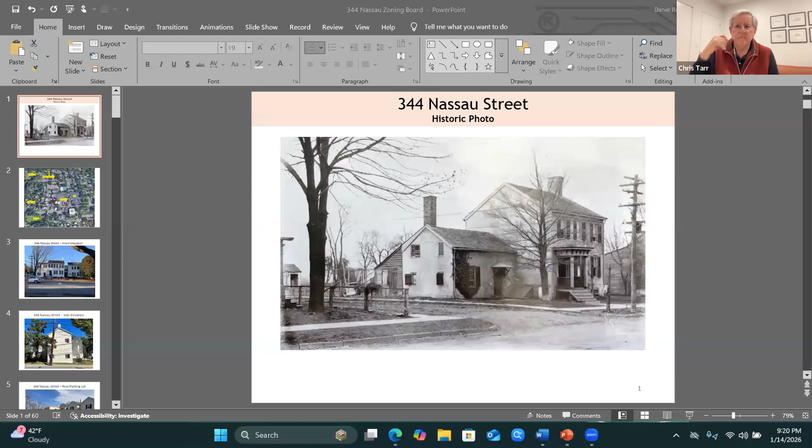Hello, good evening. My name is Daniel Barsky, and I will be presenting on behalf of the applicant for the project on 344 Nassau Street. On slide 1 is a historical picture of the building at 344 Nassau Street, which was originally built in 1760 and is also known as the Joseph Horner House. It's located in the neighborhood historically called the Jugtown District, and much of this application is based on preserving this building and its historic context within Princeton.

The site is located on the corner of Nassau and Harrison Street, oriented within the heart of Princeton. It's only several blocks from downtown, the Princeton Shopping Center, and multiple parks. It's also right next door to the Whole Earth Supermarket and Bank of America, with easy and accessible access to public transportation.

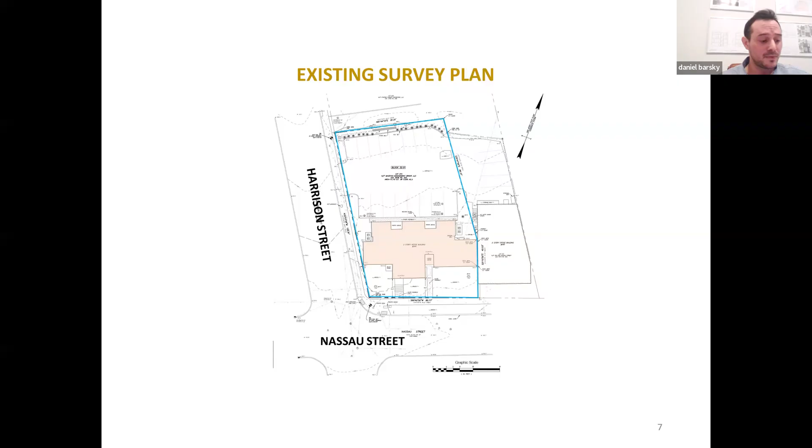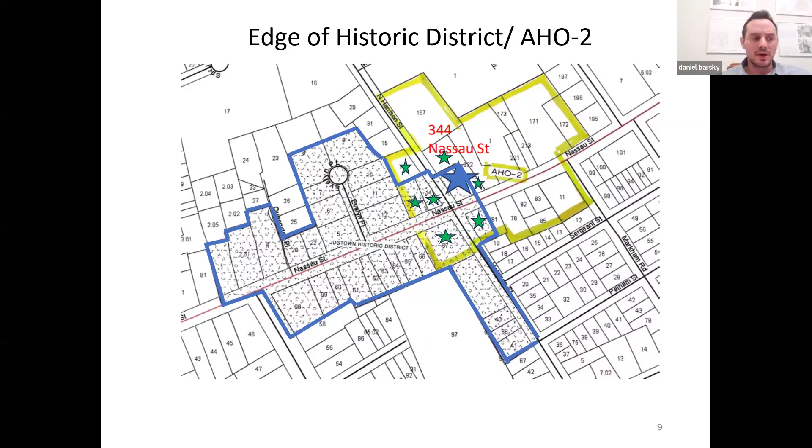I don't want to upset my friends at HPC and neighbors by bringing up a past application, but it's important that I give the history behind the approval process on this site. Over a year ago, I was in front of HPC presenting a proposal for a 4-story, 45-foot high, 16,000 square foot addition.

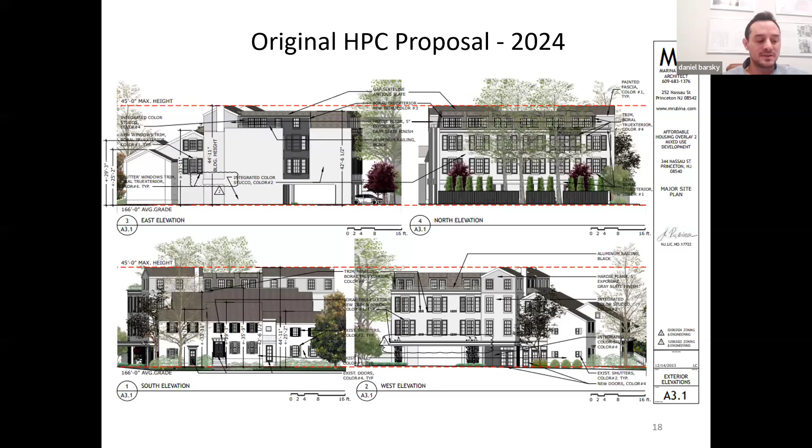The proposal was to attach this addition onto the rear of the existing building over the parking lot. Here's a rendering of what that looked like. To be clear, this rendering on slide 18 is not what we are proposing today at this zoning board meeting.

That's because we heard from HPC and many of the neighbors, led by the Save Jugtown group, about their displeasure with the proposal. The consensus from the community was that this previous proposal was not consistent with the historical district and neighborhood, specifically in terms of scale and massing. Most importantly, attaching a new building to the existing Horner House was a major concern in preserving the historical significance of the site.

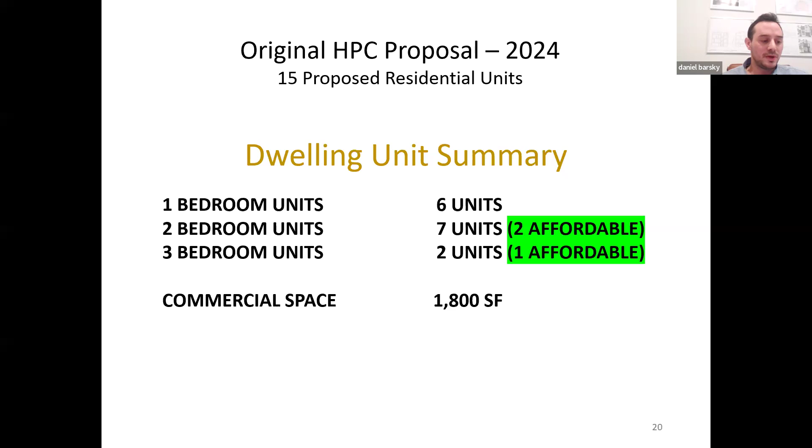The previous design proposed 15 units among 4 stories in a much larger building than in my newly revised proposal. But it's critical to note that this previous proposal was conforming to zoning in all respects. It met all the criteria for a fully conforming application after it went through the municipality's completeness process. Moving forward with this previous proposal would mean that I wouldn't have to come here tonight in front of the zoning board for any relief.

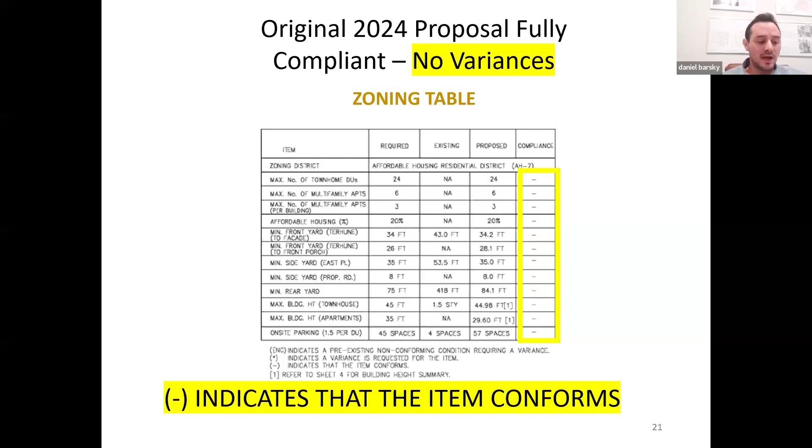However, after hearing feedback from HPC and my neighbors, instead of plowing forward with a fully compliant application, we decided to revise our proposal with the help and collaboration of Save Jugtown leadership, to propose a new building that is more in line with the neighborhood and better preserves the historic streetscape.

Now, on slide 22 is our revised building proposal that we're here today to hopefully get approval from the zoning board for. This new design proposes a freestanding building, totally independent and detached from the existing historical Horner House. There will be no demolition or disruption to the existing building.

Thanks to collaborating with our neighbors and HPC, we were able to come up with a plan that has been overwhelmingly well received by HPC and the surrounding neighbors. We feel this new design complements and preserves the existing historical building, providing an aesthetic improvement to the gateway of Princeton.

This new proposal has 10 residential units. 2, or 20% of them, will be allocated to the affordable housing obligation. The existing Horner House is to remain under its existing use as a commercial space.

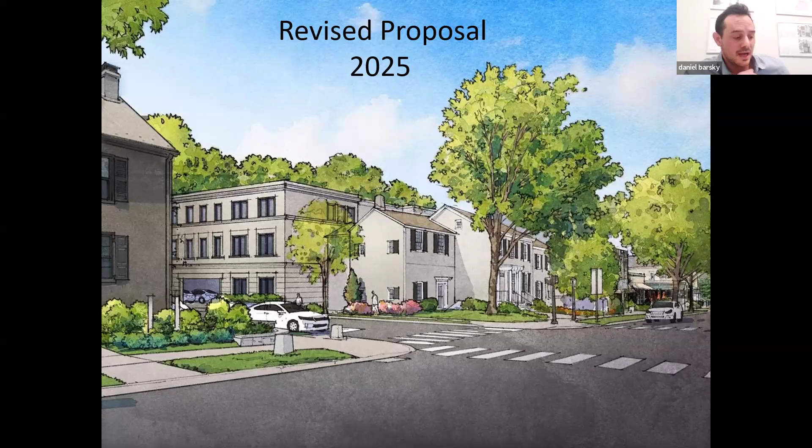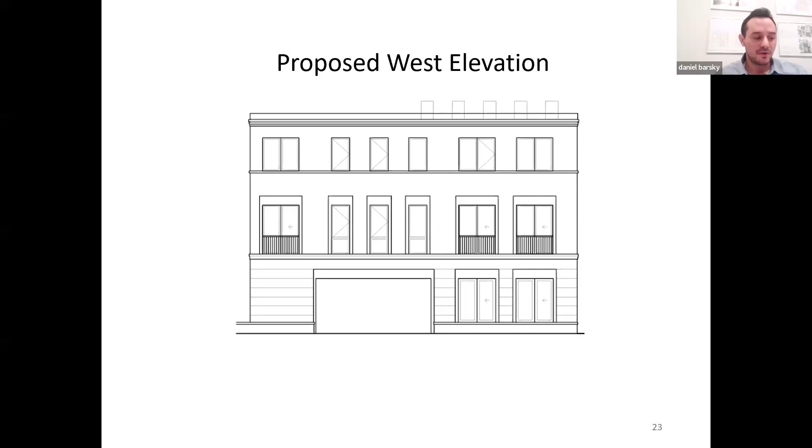Reducing the scale and massing of the building, along with its simple design, allows this proposed building to nestle into the site without greatly detracting from the Horner House. Again, critical to the design was to have it freestanding and totally separate from the existing building.

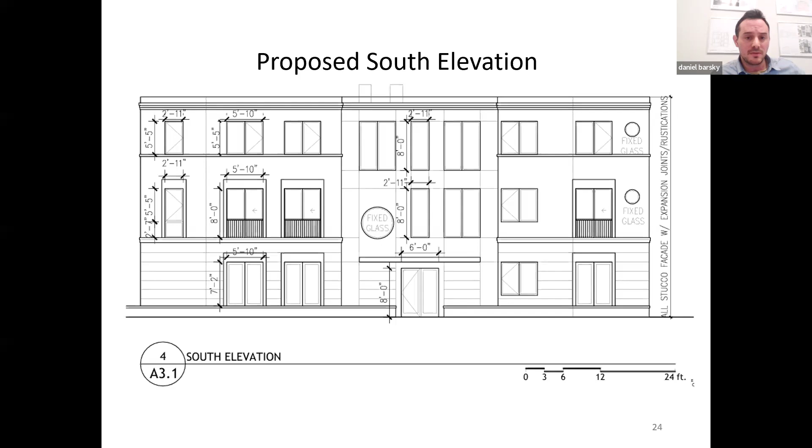On slide 24 is the south elevation, which faces the existing building on 344 Nassau. The north elevation faces the Foot and Ankle Doctor. And the east elevation faces Weichert.

On slide 27 is a cross-section of the building floors and height. We're proposing a 35-foot assembly with a 1-foot parapet, totaling 36 feet, reducing the height from the original 45-foot high compliant application, which was important in establishing compatibility with the neighborhood. As illustrated earlier, the height is in keeping with other buildings within the immediate vicinity.

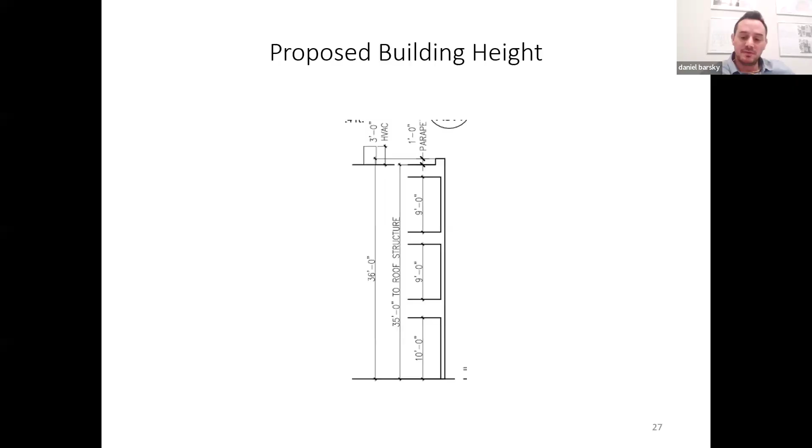This reduced height and scale ensures that from Nassau Street, the new building will not be seen from either side of the road, as depicted in this sightline drawing, standing on the sidewalk closest to the building and on the opposite side of Nassau.

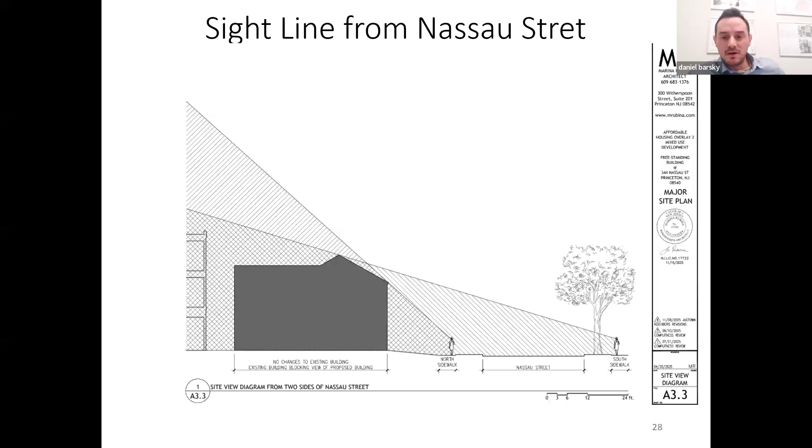The floor plans are relatively simple. There is access to a lobby from both the parking lot and the walkway. The building will be comprised of 9 2-bedroom apartments and 1 3-bedroom apartment, which is to be deeded for the affordable obligation.

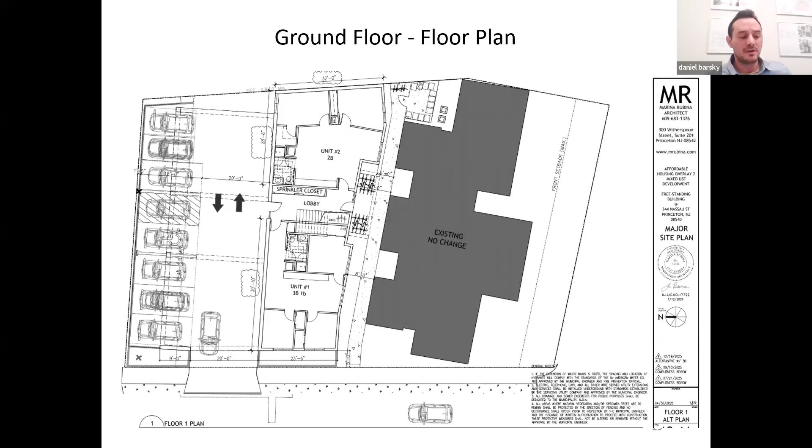2 of these apartments are located here on the ground floor. There's a walk-up stairway and 4 more units on the second floor, and then 4 more on the third. The second and third floor layouts are identical, so these are repeats for second and third floor.

There's a proposed flat roof with a parapet where condensers will be located. They're located in the middle of the span, so they won't be disruptive to the street and won't be visible. And I heard this come up in one of the comments.

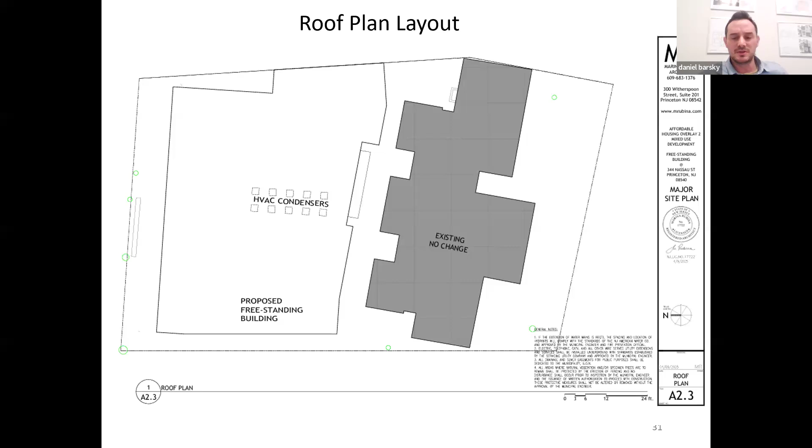I will install solar panel ready provisions during the course of construction. This revised plan, as we heard from the chairman, was encouraged and later approved by HPC. The redesign was coordinated with Save Jugtown leadership, our neighbors, and found to be compatible and aesthetically appropriate. Separating the new from the old, not disturbing the historic Horner House in any way, and reducing the scale and massing of the new building was an essential component of this compromise that HPC voted to approve.

The trash and recycling is located in the corner of the lot between the buildings, behind a fenced enclosure, where it does not impact any streetscapes, but is easily accessible for the existing and new buildings to access. Bicycle parking has also been addressed with bike storage distributed under the lobby door canopy, outdoor at the end of the walkway, and inside the building.

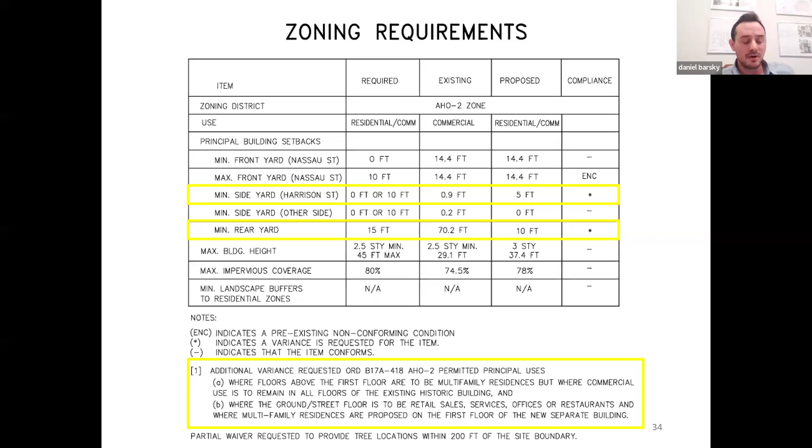To go through these one at a time, the side yard setback again requires 0 or 10. We originally had 0 feet, which was compliant, but after our discussions with Save Jugtown and HPC, we decided that wouldn't be appropriate. And again, though compliant in our original application, 10 feet was set back too far given already the reduced footprint of the proposed structure. So with collaboration from Save Jugtown, we determined 5 feet would be an appropriate setback to preserve the significance of the existing Horner House. At 5 feet, the new building is set back behind that existing structure.

The property backs up to an active easement, which is there to access the Whole Earth supermarket parking lot. The site backs up to a commercial zone where currently the Foot and Ankle Doctor is located. So we feel the impact is minimal considering there's not residential zoning in the rear and that we are still providing a 10-foot buffer.

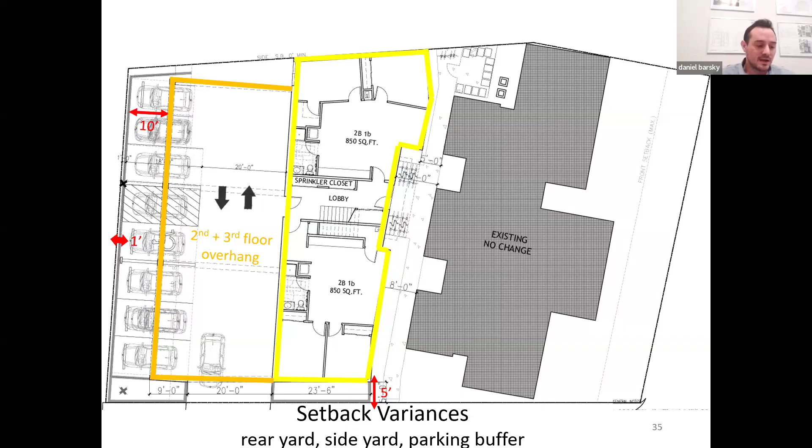There is a variance request under section 382-383 for minimum building separation for structures on the same property. The minimum distance requirement is 10 feet between buildings on the same lot. Slide 37 illustrates the variance conditions under section 382-383. To be clear, the proposal meets the requirements relative to adjacent neighbors. We're seeking relief for minimum distance between buildings on the same lot.

Illustrated here are the separations between old and new. The distances vary from 5 feet, where it's non-conforming, to 10 feet, where it is conforming. The new building can't be distanced any further without triggering many other bulk and parking variances. Most importantly, the proposed separations meet fire and building code. It's worth noting too that the existing building is fully sprinklered and the proposed building will be sprinklered as well.

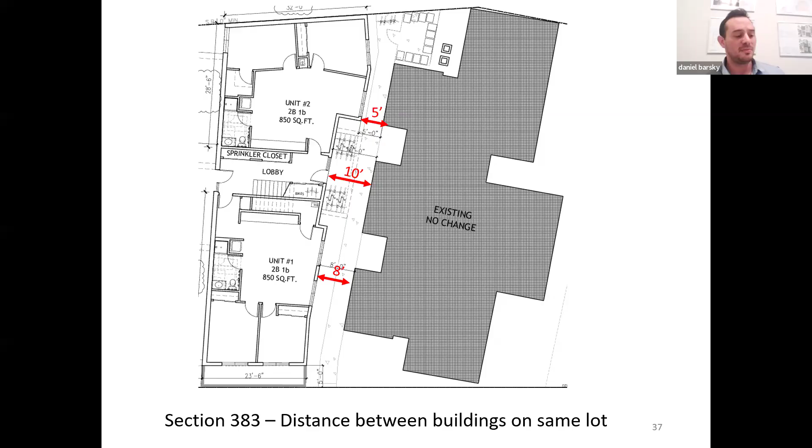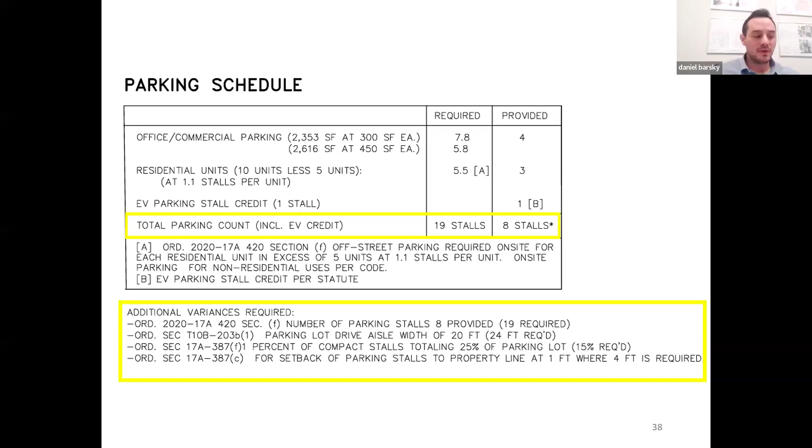In the original proposal, because the buildings were attached, there was room for parking on both sides of the drive aisle. Now that the buildings are separated, parking has been reduced, triggering variances: number of stalls, 8 where 19 are required; percentage of compact stalls, 25% where 15% is permitted; and width of the drive aisle, 20 feet where 24 feet is required.

The plan calls for 7 parking spaces and gives 8 with the credit for EV charging. 19 spaces are required, mostly due, in my opinion, to the outdated underlying parking requirements for office space, which I'll discuss on the next slide. There are 2 compact stalls proposed where only 1 is permitted, and a 20-foot drive aisle where 24 feet is required. I have a traffic expert who will testify on parking more generally, but I can speak to parking as a local resident, developer, and landlord.

I'll start off by saying we believe the parking variances are justified in the attempt to preserve the historic Horner house. Distinguishing and separating the buildings reduced the total number of parking stalls from a compliant amount to a non-compliant amount.

More importantly, this site is located in town. It has walkable and bikeable access to supermarkets, banks, the Princeton Shopping Center, and downtown, as I illustrated in an earlier slide. As someone who owns other rentals in town, a handful on Nassau Street, for people looking to rent in this part of town, parking is not a priority. They rent at these locations for the walkability and bikeability, along with easy access to public transportation and downtown amenities.

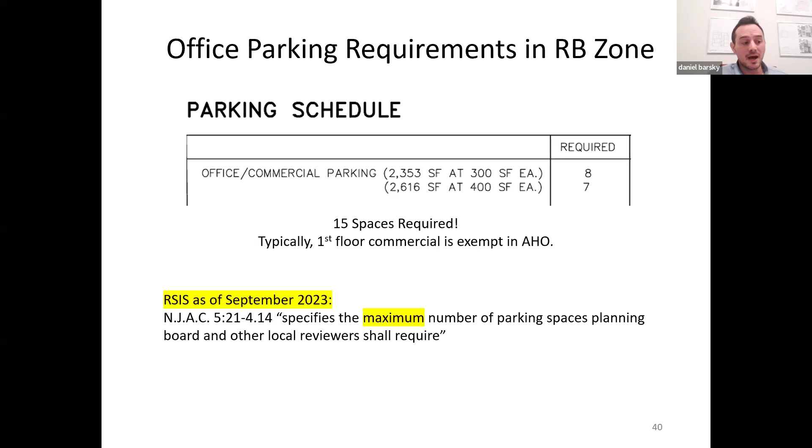We were able to secure leases and letters of intent from neighboring properties with available spaces to rent. I don't anticipate I'll need all these spaces to fill the units, but this is just to illustrate that there's lots of parking available in this part of town, in the vicinity. Also, Bank of America, they don't issue letters of intent, but they verbally represented that they would lease spaces as well once we're ready to commit to a lease with them.

And before I address comments from the municipal memos, and while we're on the topic of parking, I'd like to introduce Georges Jacquemart, a traffic consultant expert. I'll allow Chris Tarr to qualify him and give him a few moments to speak further about parking.

Thank you, Daniel. George, you've testified in Princeton many times, but just for those members of the board and the public who aren't aware, I'm going to read from your resume. You are a New Jersey professional planner. You're a professional engineer in California, New Jersey, and New York. You have a Master of Science degree in urban planning from Stanford University. Interestingly, you've been a consultant to Princeton University on parking and traffic matters since 1988. You've worked on projects such as Arts and Transit, the Lake Campus, and a separate project for Palmer Square traffic modifications. I believe that you could be called the father of the roundabouts that exist on Faculty Road.

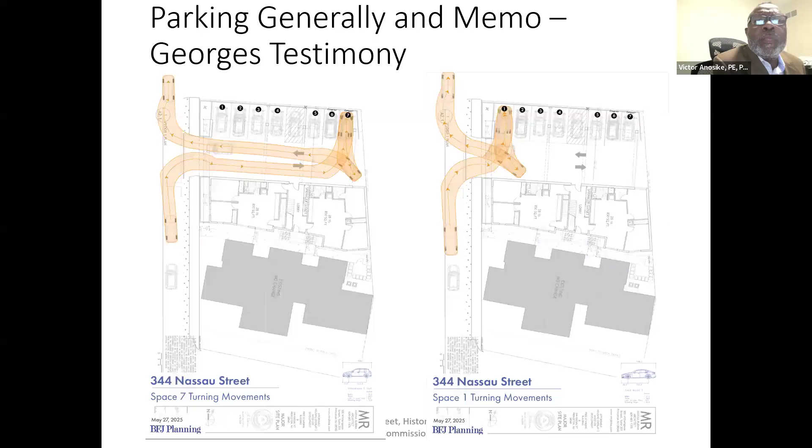So one of the comments I made was with regards to access to the Weichert parking spaces, the two, if you will call it, eastmost parking. Yeah, just stay back on that. Right, it's a new slide. Okay.

If you want, I can comment on them. So there you can see roughly 5 spaces in that parking lot, A, B, C, D, and E. The ones most difficult to get in and out are D and E. For space E, that's very close to that building, and that's how the space is located today. As the car enters, it will stay at a certain angle that makes it easier to get out. You can see how vehicle E backs out and backs toward vehicle A sufficiently so they can move out in one maneuver.

We show the same for vehicle D in the next slide. That vehicle, because it's a little closer to vehicle A, has to exit in 2 maneuvers. Obviously that depends a little on the size of the vehicle and the ability of the driver, but it does show that space D can get in in 1 maneuver and get out in 2 maneuvers. So it does still work.

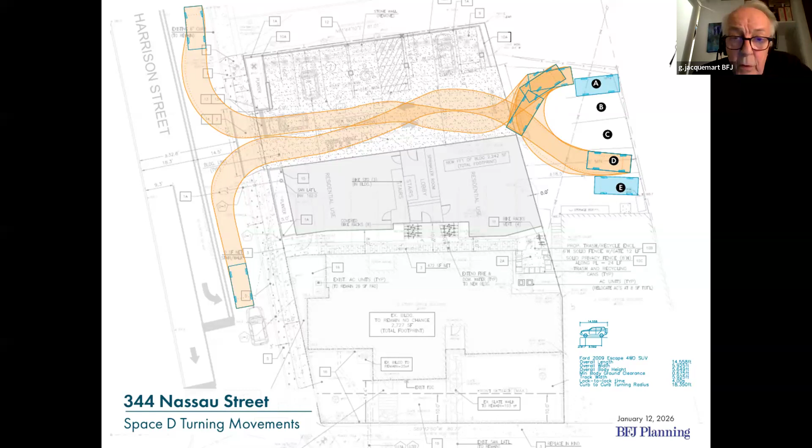So what size of vehicle is used for this template? I think for spaces D and E we use the vehicle you see at the bottom, a Ford Escape I think, shown in the graphic. So the Weichert people, if they have large vehicles, put them in A, B, and C. If they have smaller vehicles, they go into space D and E.

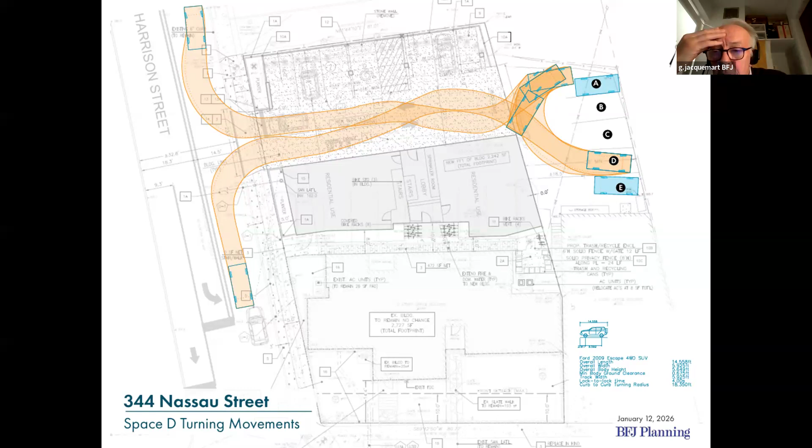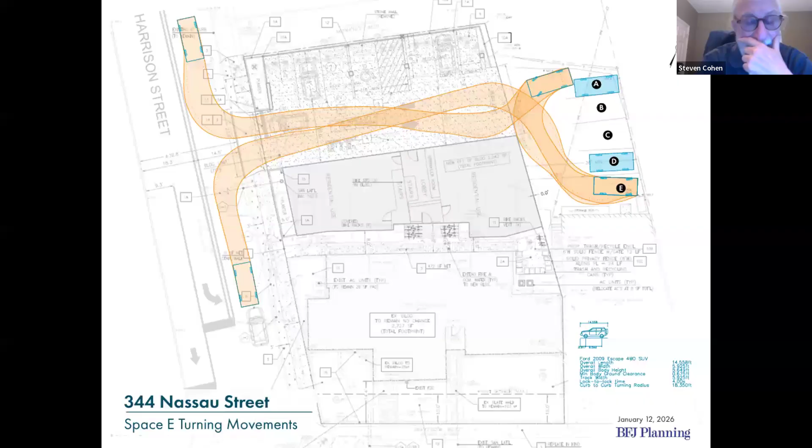Do you know, Mr. Jacquemart, are these Weichert spaces assigned or open? I don't know the answer to that. The only reason I ask is if it's someone new every time trying to figure out how to get into a space, it's more difficult than if somebody does it every day. Yeah, I imagine it's mostly Weichert employees that park there. I don't know, I've never seen a sign directing visitors to this parking area. I'm not sure exactly how it works, but I assume it's mostly employees. Yeah, okay. That's purely up to Weichert. Sure.

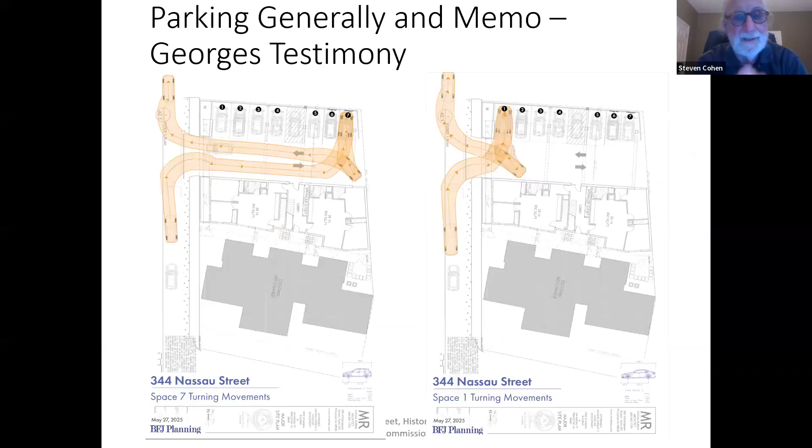Any other questions? Board members, staff, anyone? Okay, Mr. Tar, you have the floor.

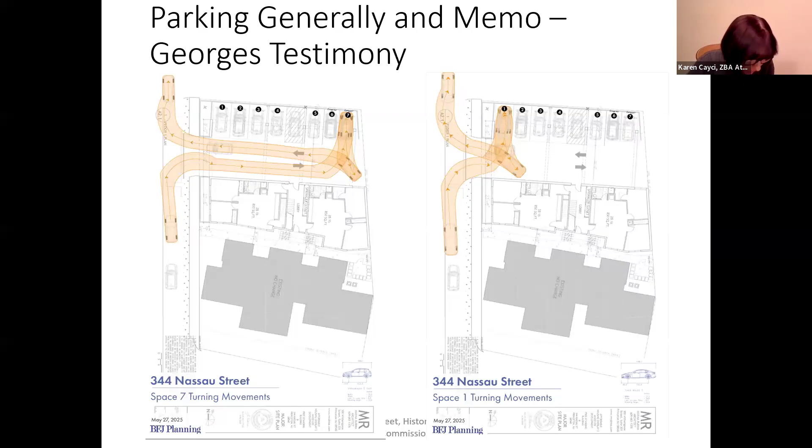Mr. Chair, I think Mr. Barsky is not done with his slide presentation. I think he's up to slide 44. Based on discussions with the chairman, if any of these are truly engineering in nature, we could skip over them and have Mr. Kamalik speak at the next hearing, if that's the chairman's preference. We'll see how things progress, and then Mr. Barsky can decide what he wants to do.

Okay, well, I'll go through the comments. While on-site stormwater management is not required for this development, the current standards for dry wells should be applied for the relocated dry well, and only stormwater runoff from the roof shall be directed to the dry well. I spoke with James Klamalak, my civil engineer, and he suggested adding this to the BMP manual as part of regular maintenance to inspect the dry well.

The next comment was to demonstrate why a connection to the municipal stormwater sewer is not provided coming out of that dry well. Number one, it's not required, but more importantly, if I'm not mistaken, it's regulated by DOT and would require DOT permits, which we'd really like to avoid.

The site plan does not indicate how parking lot runoff is collected or treated. It's preferable that this runoff be treated prior to discharge to the municipal stormwater system. This is really only a small uncovered strip of parking at the northern boundary of the lot line which is exposed. The roof runoff shall be pre-treated by leaf screens, diverters, and roof washers.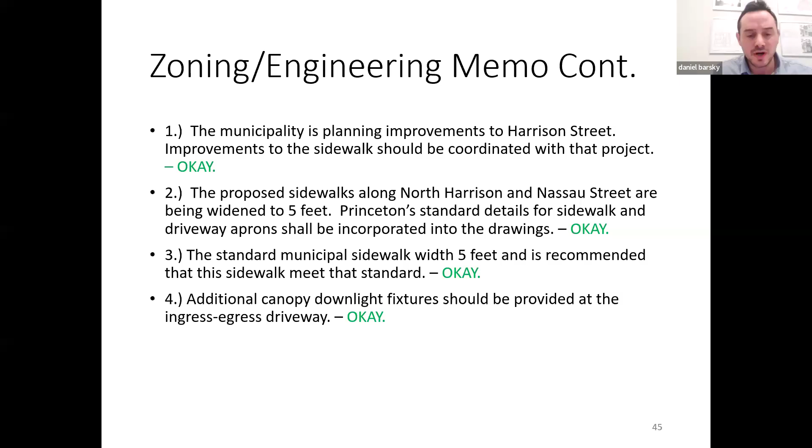Additional canopy downlight fixtures should be provided at the ingress egress driveway. Okay, the applicant will comply with that.

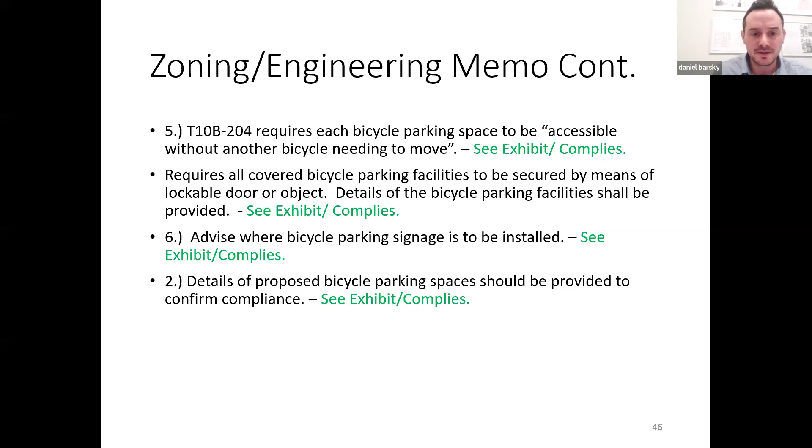Section T10B-204 requires each bicycle parking space to be accessible without another bicycle needing to move, and I'll show you in the next slide exhibits that we comply with that. It also requires all covered bicycle parking facilities to be secured by means of a lockable door or object, and on the next slide I'll show an exhibit with bike loops for locking. It also says to advise where bicycle parking signage is to be installed, which I'll show on the upcoming exhibit, and details of the proposed bike parking spaces should be provided to confirm compliance. Here's the sheet with the bike details.

I've included the two-sided bicycle parking signage, indicated here along Harrison Street, which is required. Also illustrated is the bike storage under the awning to the front door. There are 8 covered bicycle parking spaces with 6 metal loops for locking. I've also increased the walkway between the buildings from 4 feet to 5 feet to comply with T10B-204, to permit accessibility without another bicycle needing to move, so people can pass. The reality is there are 2 entrances to the building, and it's a relatively low-use building with 10 apartments and access from both ways, but we did increase the walkway.

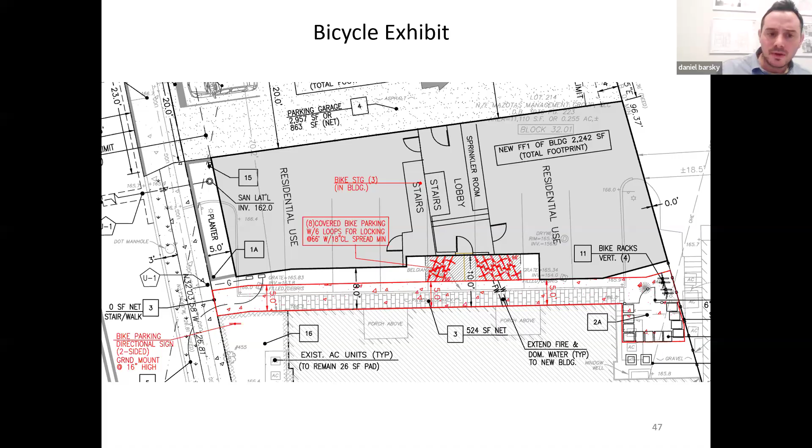On slide 48, just a closer-up version of the increased width of the walkway and the covered bicycle layout. Again, these changes meet the bicycle ordinance requirement as stated on the municipal memo, and the applicant will include these details as part of resolution compliance.

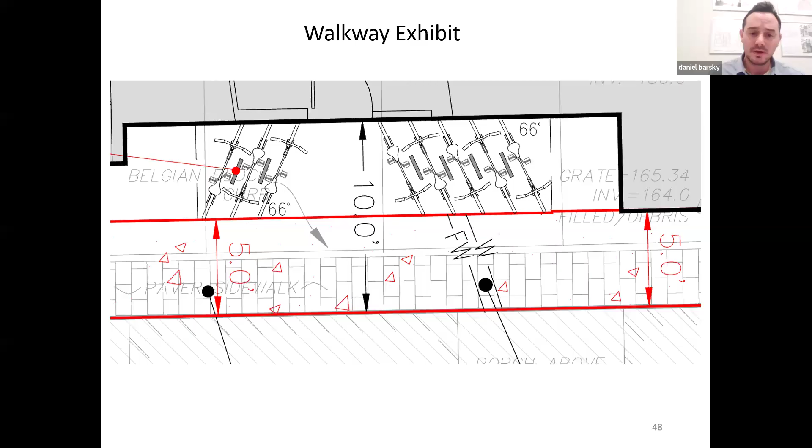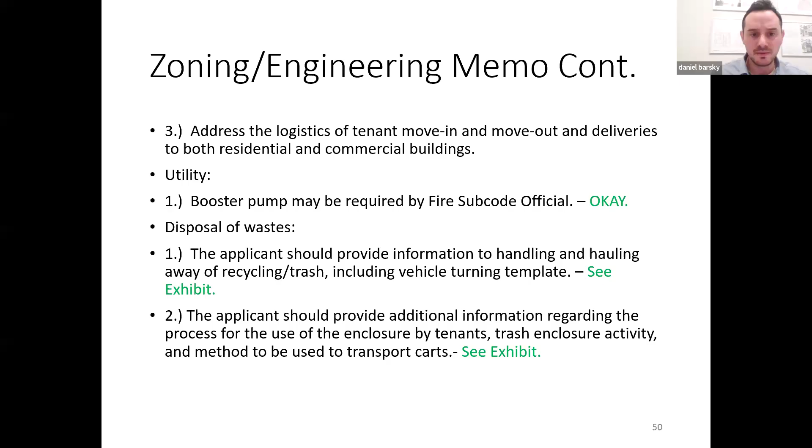For Dan Dobromilsky's landscape memo, we agreed to all the recommendations. Most of the trees on site are in bad shape, dead or invasive species, and we'll follow all his recommendations in the report. One caveat is that there's a recommendation to remove some invasive species behind 350 Nassau Street. That's on another property, so I'm not able to take them down, but I'll certainly attempt to coordinate with the neighbors while the tree crew is there to have them removed.

Many of the planning memo comments overlap with comments I just previously addressed, so I'll address the outstanding ones. The parking area clearance is 10 feet high, enough for a small U-Haul truck and standard size delivery trucks. On one of the existing elevations, I was missing the 2 chimneys on the existing building. Those chimneys are going to remain. There's going to be no change to the existing building whatsoever.

There was a question about the first floor elevation facade material, that it wasn't clear on the drawings. It is stucco. There was also a recommendation to install a plaque to recognize the historic nature of the Horner House, and I'm happy to do that, and I can coordinate that with HPC for what exactly it would say.

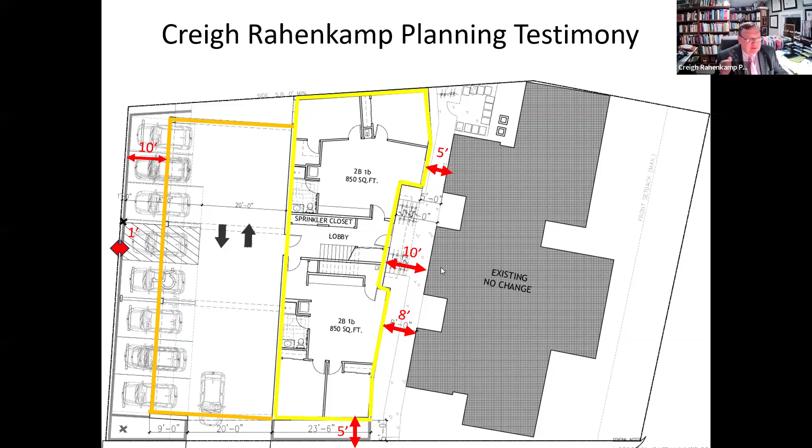One of the things we have to realize about the population we serve with the price-restricted units is that they have certain demographic characteristics. The principal one is that well over 70% of the households are single parent families. There's a logic behind that—obviously if you have two incomes, you're far less likely to qualify. The units are allocated by family size, so we know a 3-bedroom unit is always going to generate two children. We don't know the ages, but the units will be allocated so that there are two kids in that 3-bedroom unit, which means bikes, prams, strollers—all of that accoutrement is going to be part of that unit.

Because this is a walk-up building with no elevator, I think it's very important that the 3-bedroom unit be on the ground floor, meeting the demographics we can expect realistically. 2-bedroom units can have a child, but sometimes they don't. This gets into the disabled and caregiver pairings, the second largest household formation type in the restricted units—that can be a mother-daughter configuration with an elderly mother and adult daughter, or a married couple with one disabled with one income earner. Because that's a disabled population, being on the ground floor in a walk-up building makes sense. So it was my recommendation that for these demographic reasons, it made sense to put them on the ground floor.

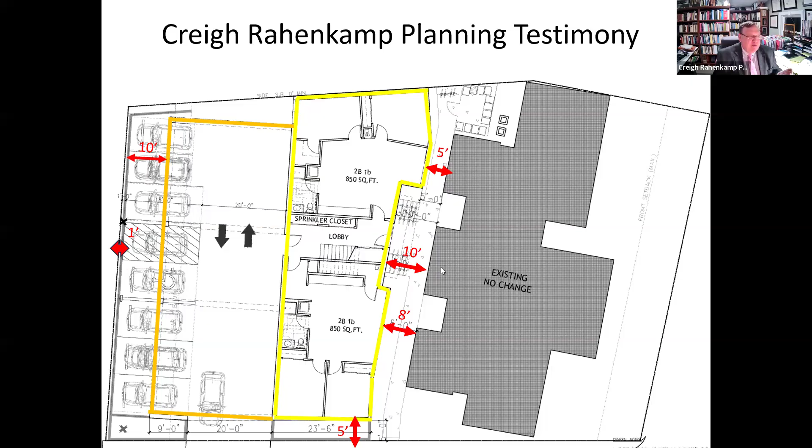As Daniel said earlier, the ground floor units are actually valuable—there are lots of seniors who would avoid stairs, so having that ground floor as a market rate unit is viable as well. It's not that we're reluctant to move the 2-bedroom up if that's where you want to go. We just recognize that means there's a population in the restricted market we're trying to serve that would not be serviced by these units because of the stairs. So that was the logic behind our choices, just so you understand it as you're considering how you'd like to move forward.

Okay, I understand that. I understand your logic relative to the 3-bedroom unit, and I agree with that, although the unit is very tight, at least what I can see in this very small drawing. But the 2-bedroom unit is going to have 3 windows—one right on the drive aisle, another looking directly over the trash, and the other separated from the adjacent building by 5 feet with a 4 or 5 foot walkway in front of it. So I don't think that's really an ideal unit, whether it's affordable or market rate.

I still feel strongly about having only one affordable unit on the first floor and a fully accessible or fully adaptable unit capable of housing a person with disabilities on the first floor. As Daniel's already said, he's willing to do that. If I convince you to keep the 3-bedroom unit on the ground floor, I'm happy. That's the real key.

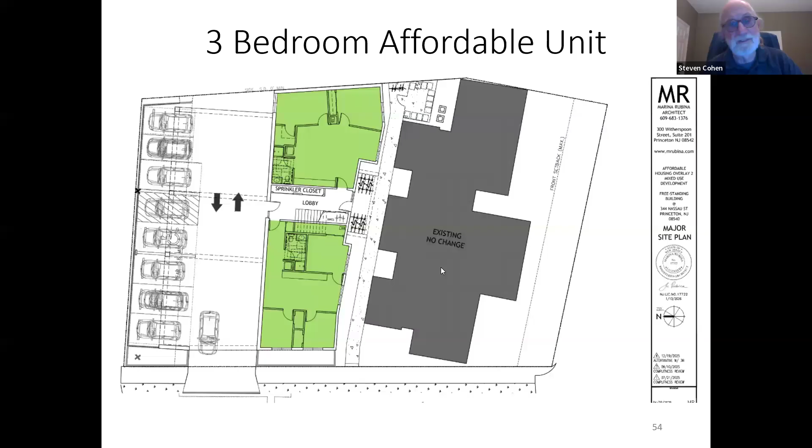Anything with respect to the landscaping? I think we had a pretty clear consensus with Mr. Dobromelski's recommendations. Well, regarding landscaping, I don't think we discussed it in detail, but you've taken out all the screening to the adjacent building and put in a picket fence, which is open. So approaching this, driving up Harrison Street, you're going to be looking directly at the parking. Right now it's a very nice landscape buffer, and that's going to disappear. Well, it's a fence with some ivy growing on it, as you see in the picture.

On your property, on the current 344 Nassau property, is a dense planting screen. And all that's coming out, and a picket fence, which is opened, is going to be separating the two properties. So it's very helpful to the applicant to hear that a picket fence is certainly something you're concerned about. They ought to come next month with a replacement fence, a different type of fence.

Well, something, I personally, I'd like to see landscaping, but it's your decision. Well, there's a driveway on the other side. You heard the testimony, there's macadam on either side. We'll ask the landscape folks if there's something that could grow in that. Well, we can discuss this, but then again, too, you're putting the parking right on the property line. Understand, so you're not allowing for landscaping. Right.

Traffic we've dealt with, the parking we've dealt with. There's no additional drawings or information that the board members envision seeing there.

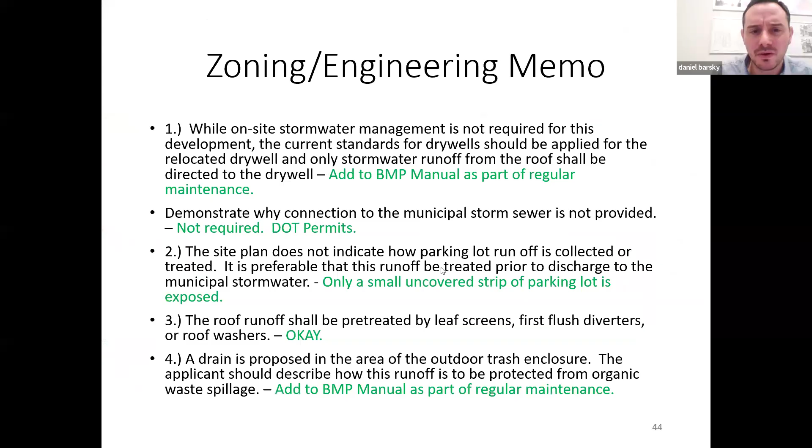And I think Mr. Lesko had a number of comments too. That's right, yeah, I was just looking it up. I think you got to address his memo too. Yes, he's got a lot of comments - the planning memo, the most recent. But a lot of the comments overlap with the others. Most of them overlap with comments I already addressed from other people's, and then I added on this section the remaining comments that didn't overlap, to talk about each one individually.

But I'm happy to go through it again if we need to at the next meeting. Well, I think we might have Mr. Lesko go through his memo so we can make sure we've got everything covered. Yep, so that was a joint memo between Mr. Lesko and myself.

I think Mr. Barsky addressed most of those. As he mentioned, there were a lot of overlaps with the other memos. However, we will also take a look on our side if anything was not addressed and make sure Mr. Barsky and Mr. Tarr are aware of that and prepared to address any additional issues from that memo. That would be very helpful. We'd appreciate that. No problem at all.

It means the panel is sized appropriately to add the right size breakers and the right size conduit run up to the roof, so that if I wanted to add solar panels in the future, I wouldn't have to do any demolition, ripping out drywall, or upgrading panels. I could just hire the solar panel company, but the basic infrastructure is done for them to pull all their roughs through. Okay, thank you. It's something I will explore on site, and at the moment I can at least get it ready for that. Thank you.

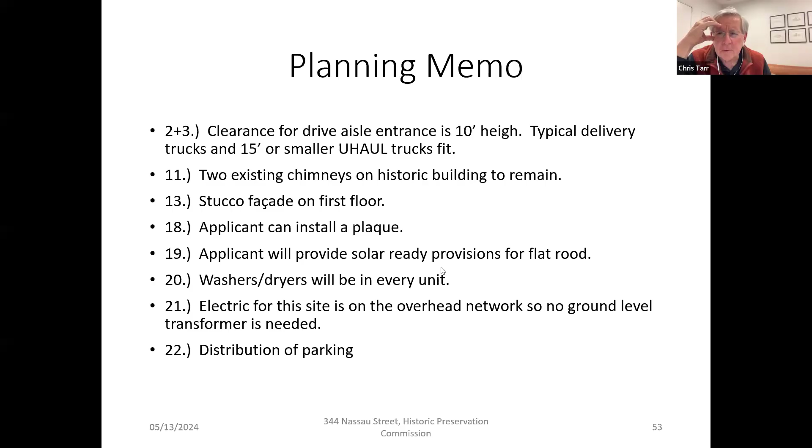This has been very helpful. We'll pull together some additional information and respond to those memos. The one practical thing I heard, I wanted to get it on the record.

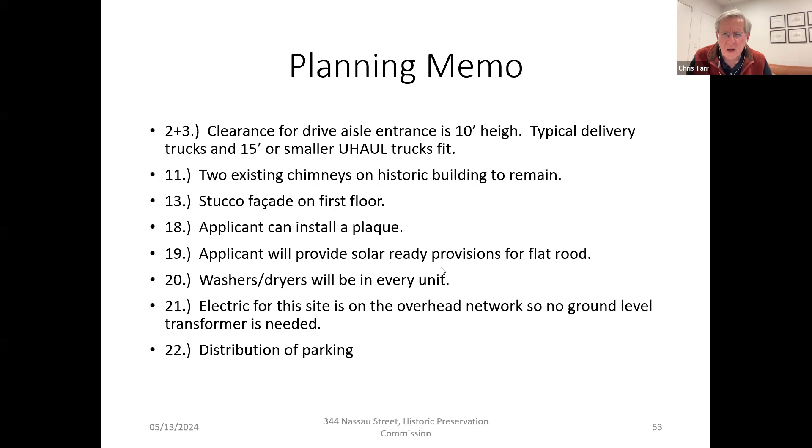Mr. Ranoseca said that you can't get into the commercial building from the rear, and you have to come in from the Nassau Street side. Daniel, is that correct? I think he said from a wheelchair standpoint. No, he said there's no access to the back of the commercial building. That's what I heard too. I have the same question you have, Chris. So, there's two rear entrances and they are still accessible off of this walkway. So there's actually two entrances off of Nassau Street and two entrances in the rear. And again, this building is to remain totally untouched and preserved, so those rear accesses will still be available.

The concern about delivery, would that be the same as for the apartments, through the parking lot? I would imagine so, but I've seen a lot of times drivers pull up, they don't realize there's a parking lot in the back, and there's spots right up the street. They park there, drop the package off, and then leave. So I've seen it both ways. They don't stop in the middle of Nassau Street, they pull into an actual parking spot. Okay, thanks.

If they don't stop on Nassau Street in front of the building, that's the only building on Nassau Street they don't stop in front of. That's true too. I think even FedEx, who has no taste or style, will go to a parking space across the street before they'll put a truck in front of that intersection.